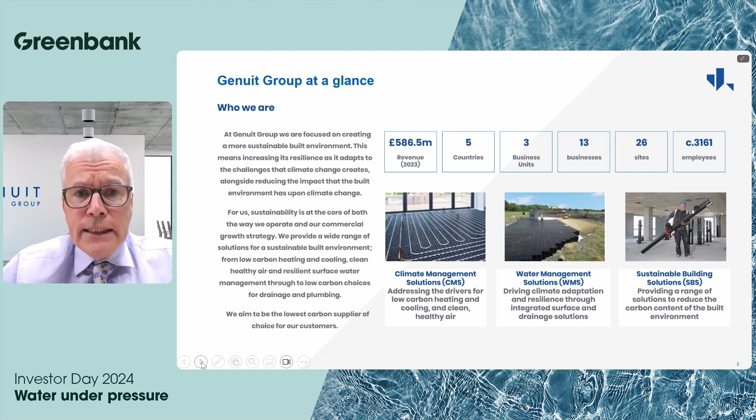So just to start with a quick few words about Genuit. We're a listed business on the London Stock Exchange, listed almost 10 years ago. Last year our revenues were just shy of £600 million. We organise ourselves across 3 business units, which I'll talk more about in a moment. We're across 26 sites, mostly in the UK. Last year, about 88% of that revenue was derived in the UK. Outside of the UK, our next largest market would be the Middle East. And we're just over 3,000 hard-working colleagues.

So we're organised into 3 business units or divisions, if you prefer. Climate Management Solutions is a group of businesses involved in the world of heating and ventilation, trying to look at low-carbon solutions such as underfloor heating, or ways of cooling as the climate warms up, as we've talked about earlier on. On the right-hand side, Sustainable Building Solutions is a range of construction products where our value proposition is very much to be the lowest carbon supplier of choice for our customers. I'll talk a bit about that on the coming slides.

And then last, but for sure not least in the context of today, our Water Management Solutions business. This is particularly concerned with adaptation and resilience in the context of both increasing water and inundations, and what to do with that increased water supply and stress on our infrastructure and drainage systems, but also how we use that water and don't just transport it from A to B, in a way that actually allows us to get some value from the rainfall that we can capture.

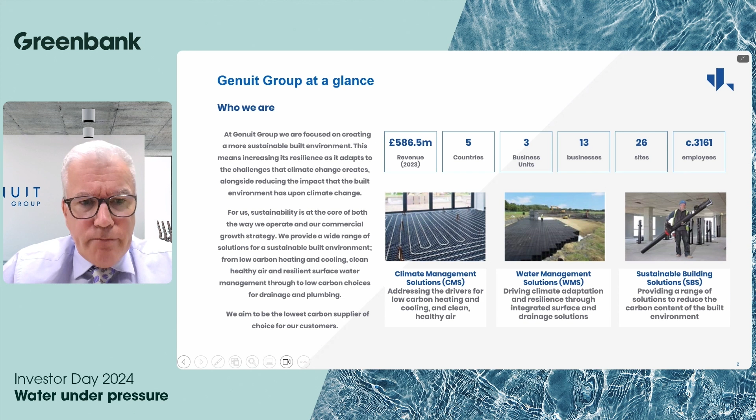So together we create sustainable living - what does that mean to us? Here at Genuit, as per my job title, we see the world of strategy, sustainability, and revenue growth as inextricably linked. Broadly speaking, we might divide that into 2 subject areas. The first one is to do with mitigation. We are concerned about the impact our operations have on the climate, so we validated our SBTs over a year ago, one of the first companies in our sector to do that. But more importantly, from the context of growth, we see being a low carbon business as a source of competitive advantage. Increasingly our customers, because of their climate commitments or their shareholder base or their purpose or whatever it might be, are interested in a decarbonised supply chain. So that's in the world of mitigation.

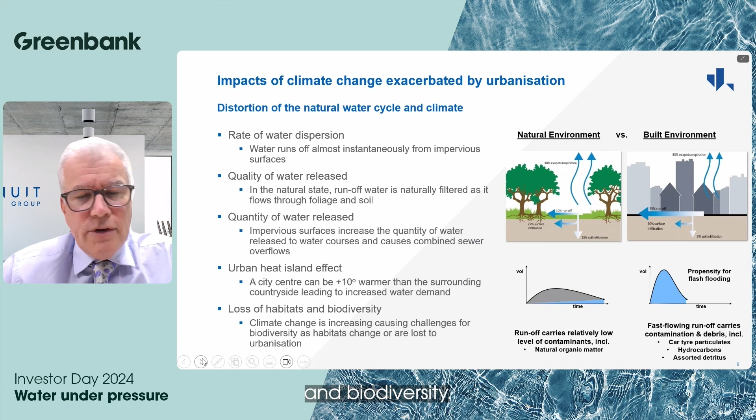The previous speaker spoke about things to do with TNFD in the future, and biodiversity. Obviously, natural habitats are also part of this same equation.

Before we zoom in as to what this might mean for us in terms of the solutions and products that we've got to try and address and mitigate some of those points, there's a regulatory framework as well as the actual climate and weather that is also trying to give us a nudge in that direction. I'll take a couple of moments to walk through each of these.

On water stress, increasingly we recognise that in our homes we need to reduce the amount of water we consume per person. Clearly there are behavioural aspects to that, but there are also going to be regulatory tailwinds, which provide innovation opportunities for us in terms of the products and solutions we can supply that mean our houses require structurally less water to run them than was the case in the past.

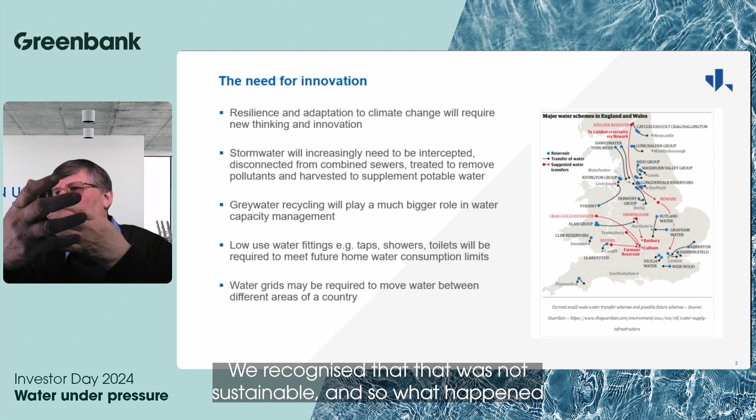Before 2002, we used to drain our developments by putting pipe systems in and moving water from those developments as quickly as possible into a watercourse. We recognised that wasn't sustainable, and so the hierarchy changed to mean that we got to look at harvesting the water first.

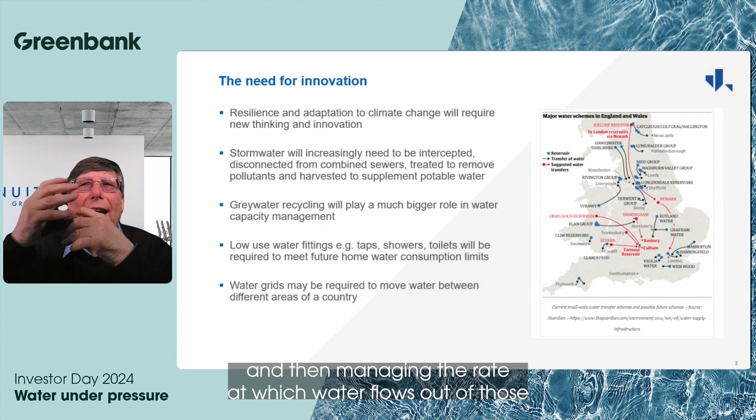Then we might want to use a soakaway, which allows water to go into the ground and resupplies natural aquifers from where we abstract water. After that, if we can't soak away, we need to look at attenuating water, which is basically intercepting it and capturing those peak flow events that Martin was talking about from the urban environment, and then managing the rate at which water flows out of those structures so that they flow into the river at a much more controlled rate and prevents river flooding.

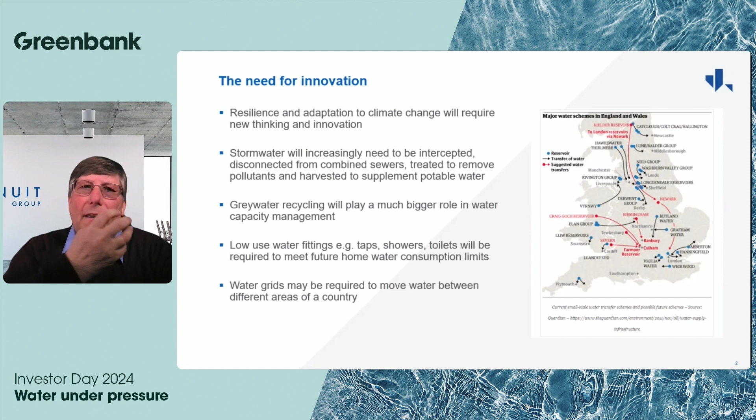And only after you've been through that hierarchy can we look at really discharging through drainage systems in the way that we have before. The benefit of that for us is that it's crystallised new markets for ways in which water could be harvested, stored and reused within the built environment. And that's led to some of the growth in Genuit and WMS.

But it's not just all been regulation. Designers are increasingly changing the way in which they build in resilience to our drainage systems. So 20 years ago, when we first started looking at water management solutions, it was typical for us to design for a flood event of 1 in 100-year occurrence.

Over the years, it's been realised that climate change is progressing at a pace where that will no longer be sustainable. So we now might design an attenuation system, a storage system, to take a 1 in 100-year event plus a 40% allowance for climate change. What that's done is it's made the infrastructure we use to manage water bigger, and accordingly it's driven some growth in the market.

The other aspect that's been touched on is pollution, because one of the challenges of our drainage systems is they were designed for a different climate than that which we have today. So our sewer systems, particularly combined sewers - and I'm sure you've all seen a lot of the coverage in the press recently and the work of activists who are pushing the government to do something about the quality of our rivers with foul water discharges increasingly occurring.

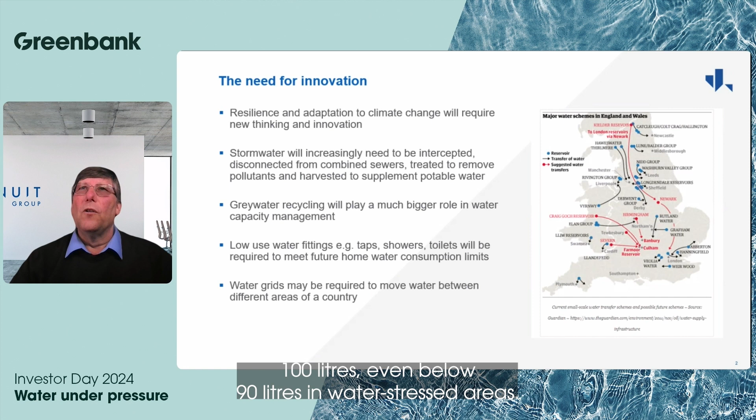But it's not just surface water. More recently, we've seen attention switch from government onto clean water and looking at tightening of the regulations, the building regulations about how much water can be used in buildings, designing them to get the per capita consumption per day down from 125 litres to below 100 litres, even below 90 litres in water stressed areas. We've seen innovations like grey water potentially having to be used to supplement clean water, for flushing toilets.

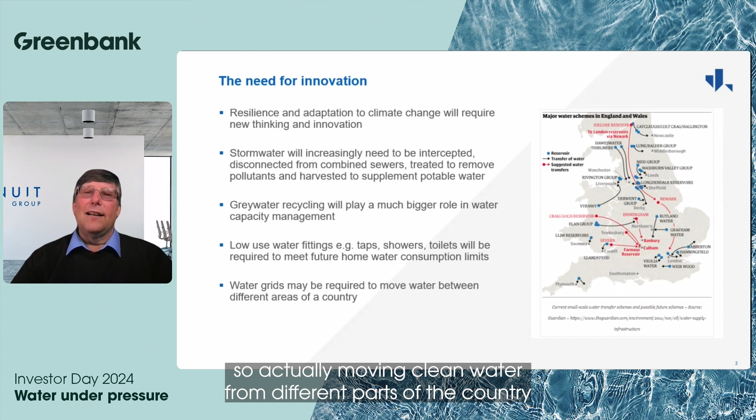And also we're seeing talk around actually water grids - moving clean water from different parts of the country where it's abundant into parts of the country where it's scarce. So that's the kind of opportunities for innovation we're seeing as a result of some of the dynamics that Martin presented. I'm now conscious of time.

I'm going to take you quickly through some of the solutions just to show you a little bit of scale and a little bit of insight as to how they're deployed.

So here we've got on the top left a scheme we did in London. It was part of something Thames Water did called Green Streets. The houses on either side of this road were being flooded when there were big sewage spills as a result of high intensity rainfall.

So we looked at ways in which we could retrofit storage underneath the road and take the surface water out of the sewer, thereby eventually giving it extra sewer capacity for those houses to prevent combined sewer flooding. That was very successful. We're now starting to see more projects like that being deployed. I think that's an area where the stormwater management market is growing, this element of retrofit and disconnection of surface water, because it mitigates the big infrastructure spends that might be required otherwise.

Top right, you've got our more historical product called Polystorm that we developed in response to the 2002 building regulation change. Polystorm is a modular water storage system. It's bifunctional in that if you wrap those modules in a geotextile, you can allow the water to soak away. And if you wrap them in an impermeable membrane, you can store the water and put a flow control throttle on the outlet to control the rate at which water discharges. We see Polystorm predominantly used in housing developments because it's very modular, so it can be deployed very locally and easily, and you can connect different tanks together to spread them out across a development.

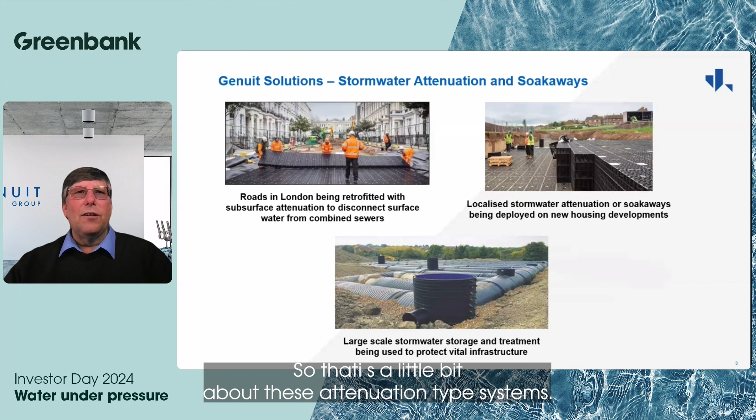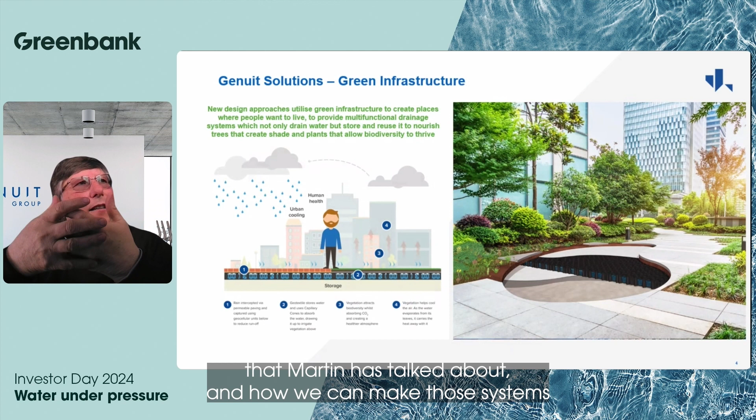More recently, we've seen the growth of green infrastructure, and this is where we're looking at solutions for inner city areas where we've got this urbanisation, this concretisation that Martin's talked about, and how we can make those systems multifunctional so that they create green spaces, which helps with habitat and biodiversity loss.

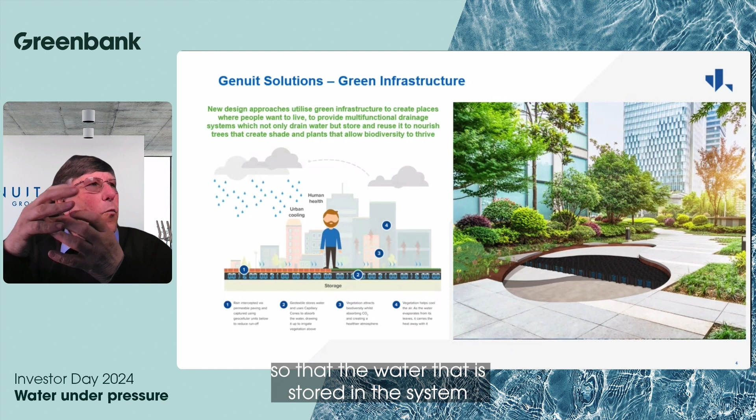Here you can see a Permavoid system with an innovation called a wicking capillary cone, so that the water stored in the system can wick up into the soils above and thereby irrigate the trees and the plants. The trees provide shade, which provides cooling. The plants evaporate through evapotranspiration, which reduces the amount of water in the tank that needs to be attenuated, and the water can be controlled and reused in that environment. That's the latest way in the urban environment that we're trying to use water to create places, but also get multifunctional benefit.

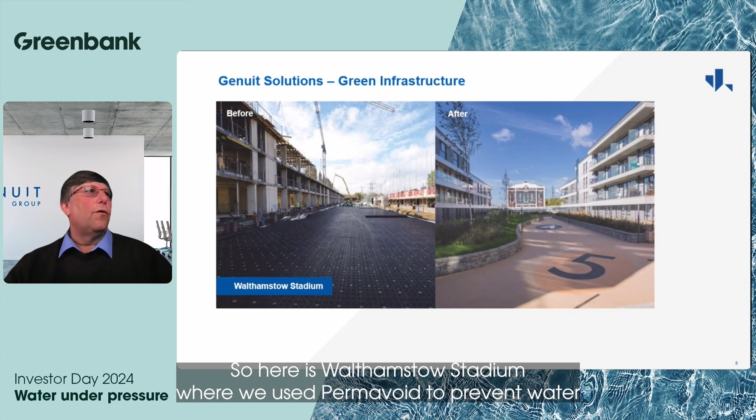Very quickly, a couple of examples of how those schemes look, as I showed you pictorially. Here's Walthamstow Stadium, where we use Permavoid to prevent water from running off into the River Lee excessively and causing flooding. You can see on the right how that scheme is landscaped and provides a much more natural environment.

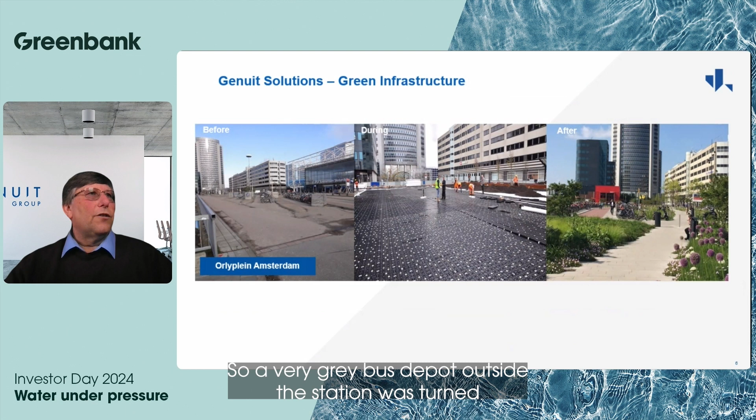And then another one very quickly in Amsterdam, which is Orlyplein. A very grey bus depot outside the station was turned into a nice green water park with planting and vegetation, again all passively irrigated from below, with habitat creation. So a little bit of an example there.

We can decide how long to keep the water to irrigate the roofs above. More often we're being asked now by cities, could we link these tanks so that a smart network of drainage solutions can be developed, with each tank deploying at the appropriate time to protect the sewers from flooding. So that's still early days on some of that in development, but we certainly start to see more interest in this solution, which we call Polysync.

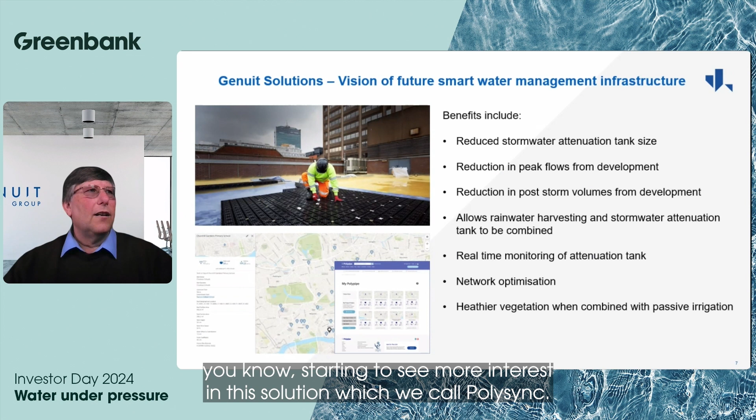So I'm conscious I'm a little bit over time, but hopefully that's given you a feel for how Genuit is deploying its innovation and its solutions, and how climate change continues to challenge us as innovators when it comes to drainage, and how that will continue because of the progressive nature of climate change. So thank you very much.